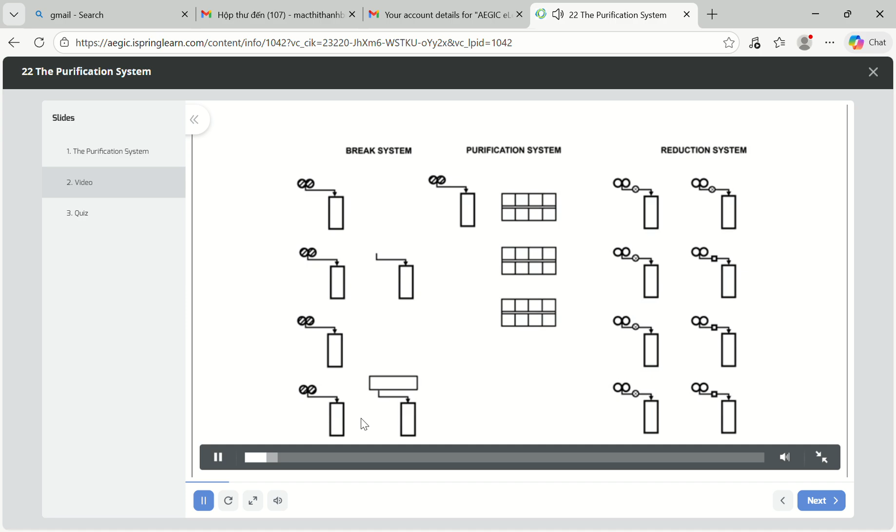The Purification System. The production of flour from conditioned wheat can be divided into three parts: the break, purification, and reduction systems. This chapter is about the purification system. In this chapter, you will learn about the purification system and how purifiers work.

The purification system. The purification system collects semolina from the break system and, after segregating into grades based on size and purity, distributes it to the appropriate parts of the reduction system. The system is mostly made up of purifiers and may also include finely fluted rolls called scratch rolls.

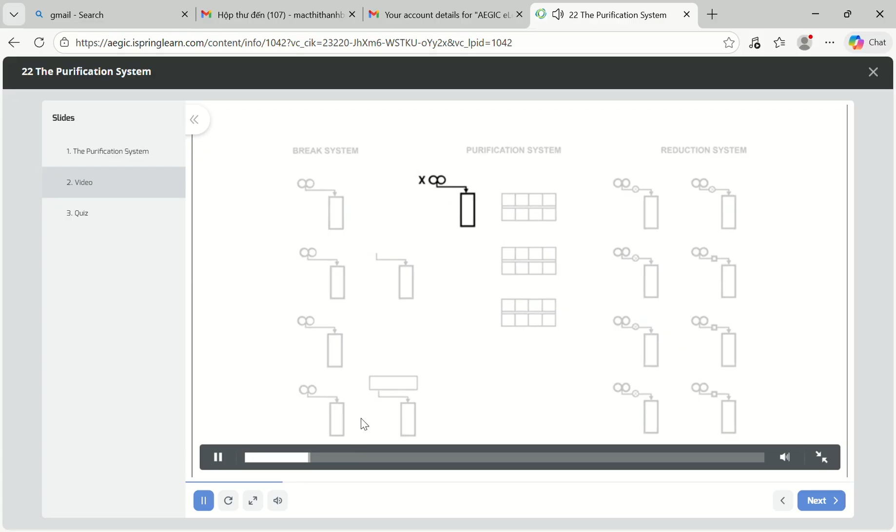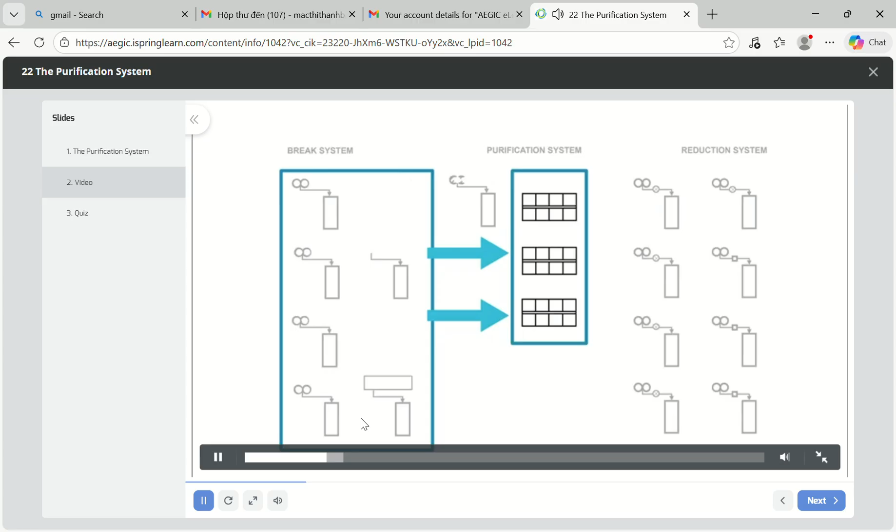The purifiers are usually all located together on the same floor. Scratch rolls are located on the same floor as all the other roller mills. The semolina from the break system is segregated by purifiers. The purifiers will segregate the semolina by size and purity.

After purification, some of it is mostly pure endosperm particles. Some of it is mostly bran particles, and some is mostly composite particles consisting of bran and endosperm joined together. There will also be some germ in the mix, but germ extraction is beyond the scope of this course.

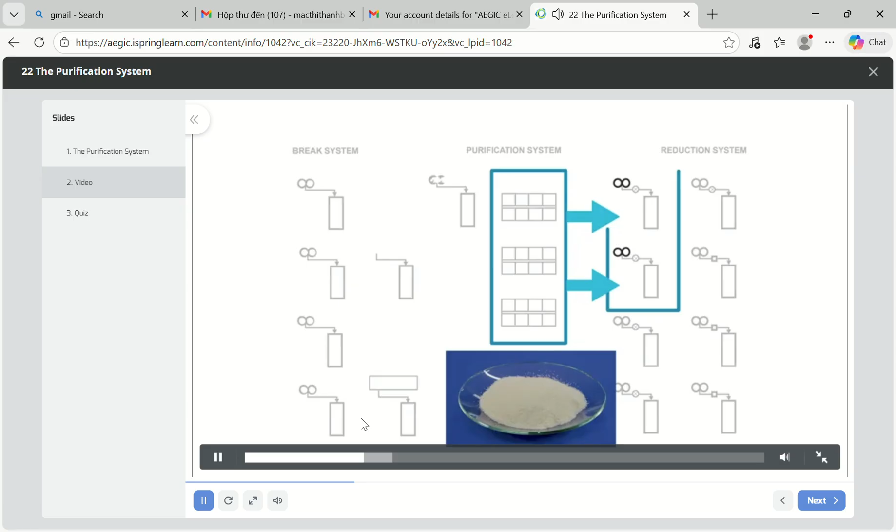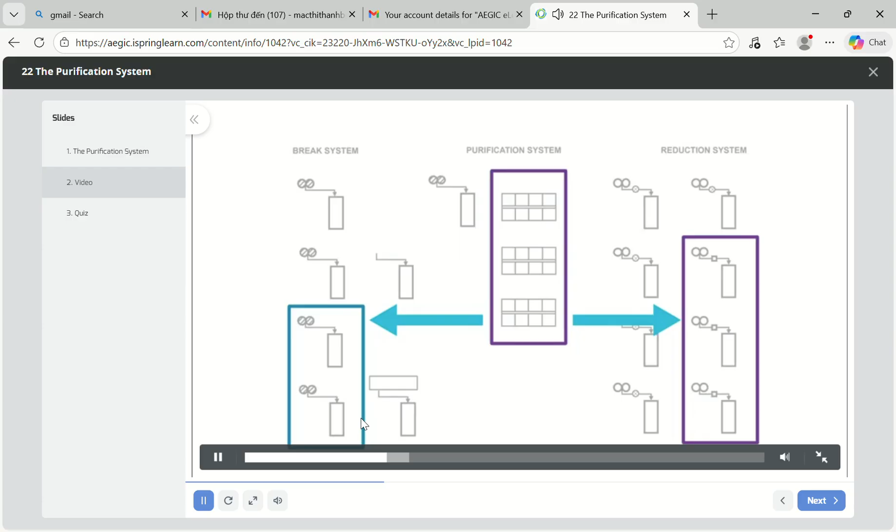The pure semolina will be sent to the beginning of the reduction system for grinding. Very clean flour streams are produced at these passages. Larger particles may be sent to different rolls to allow more accurate grinding. Bran-contaminated stocks will be sent to the end of the break and reduction systems, where the bran powder produced during grinding will not contaminate the cleaner flour streams.

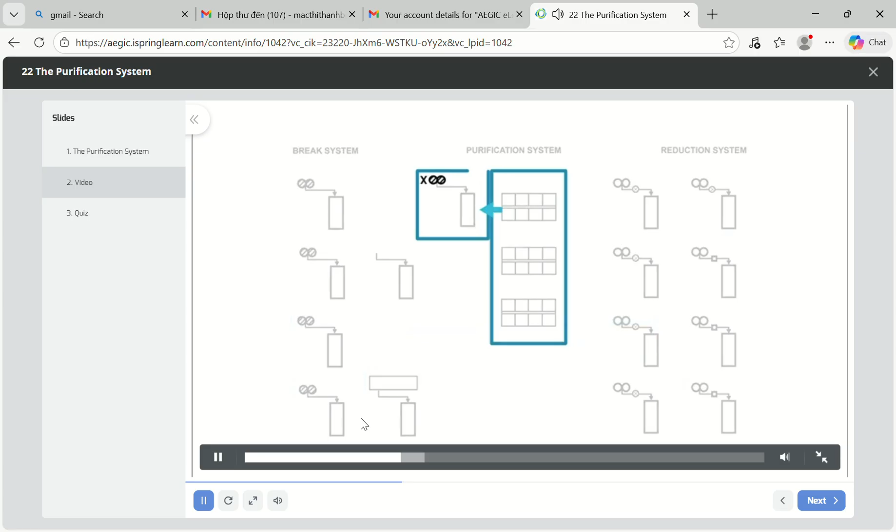Small composite particles may be sent here too, but the larger of these composite particles will be sent to the scratch rolls, where the finely fluted rolls can scratch the bran and endosperm away from each other. The scratch roll stock will be sifted to remove any material too fine to be purified, and the remainder sent back to different purifiers for segregation and grading.

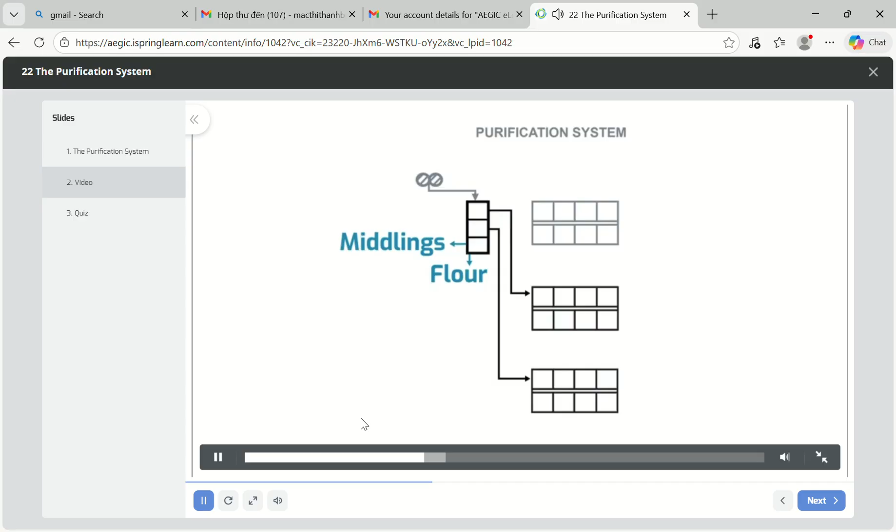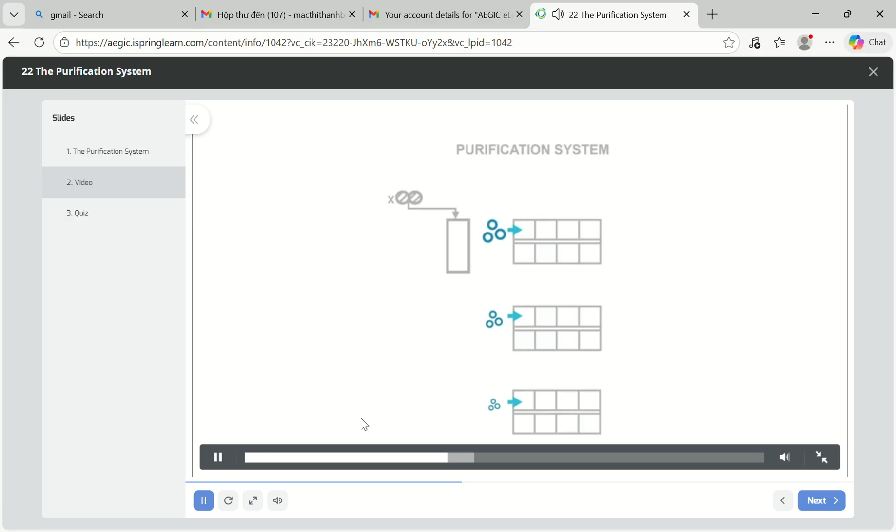Purifiers. Purifiers segregate semolina by size and composition. They need to be fed by pre-sifted stock, as each purifier is designed to handle a specific particle size range of semolina. The stock passes through a feed mechanism, which spreads the stock over the full width of the machine.

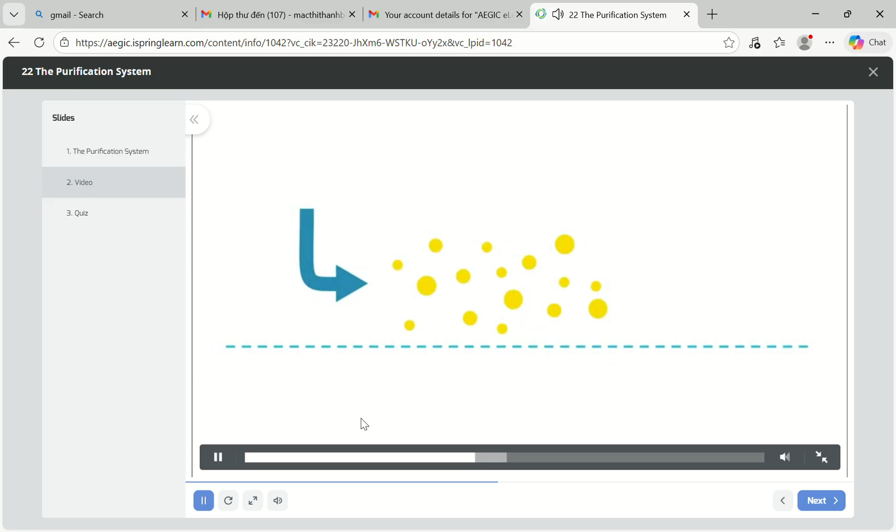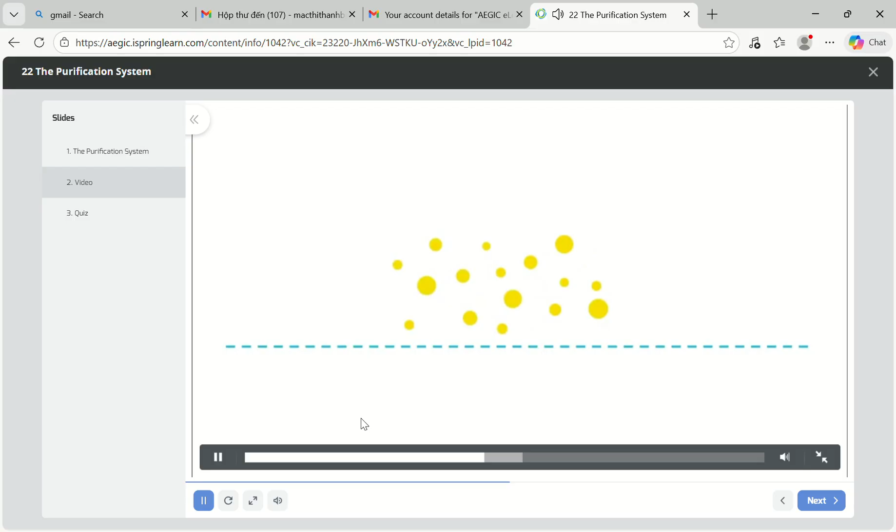The stock then passes over a vibrating sieve deck. The deck consists of 4 sieve frames in series, each with progressively more open apertures. The vibration helps the stock to move forward along the deck, but also to stratify by size. As the screen vibrates, smaller particles tend to fall to the bottom of the mass. Particles that are too small can actually prevent this segregation by causing the stocks to stick together.

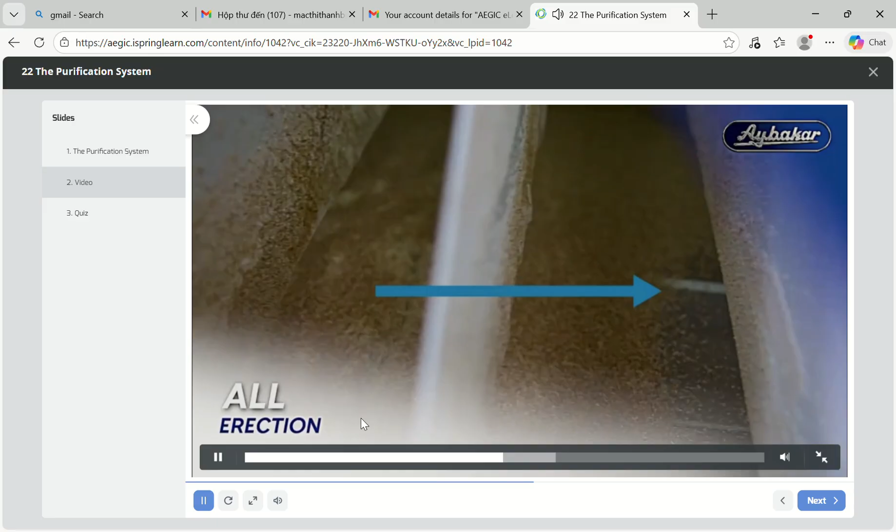Therefore, stocks destined for the purifier must be well sifted to remove their stickier, undersized particles so that they do not reduce the free-flowing nature of the semolina or impede the movement of the semolina along the screens. The screens in each deck range from fine screens at the beginning to open screens at the end. These screens may be kept clean by balls or brushes which move up and down the screen.

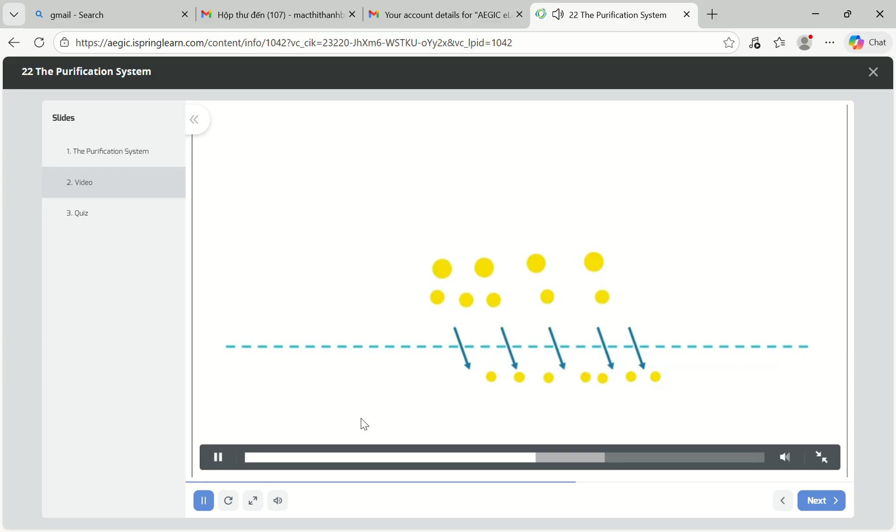Many purifiers have double or triple decks. As the shaking action causes the stock to stratify, the smaller particles at the bottom of the mass fall through the screen first. While all of this is happening, air is being drawn up through the screens. The particles differ both by size and by composition. Some particles are composed of mostly endosperm, others mostly of bran, others could be equal parts of both. These particles differ in composition and so are affected differently by the air current.

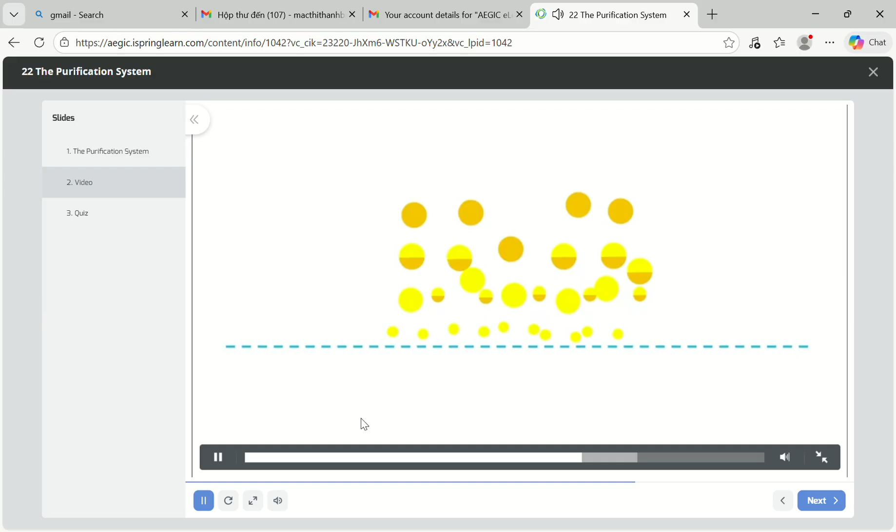Since bran is lighter than endosperm, particles containing more bran will lift above the heavier endosperm particles. The more bran they contain, the higher they lift. This process stratifies the stock by both composition and size. Some particles of pure bran are small and light enough to be lifted out of the mass and into the dust collection system.

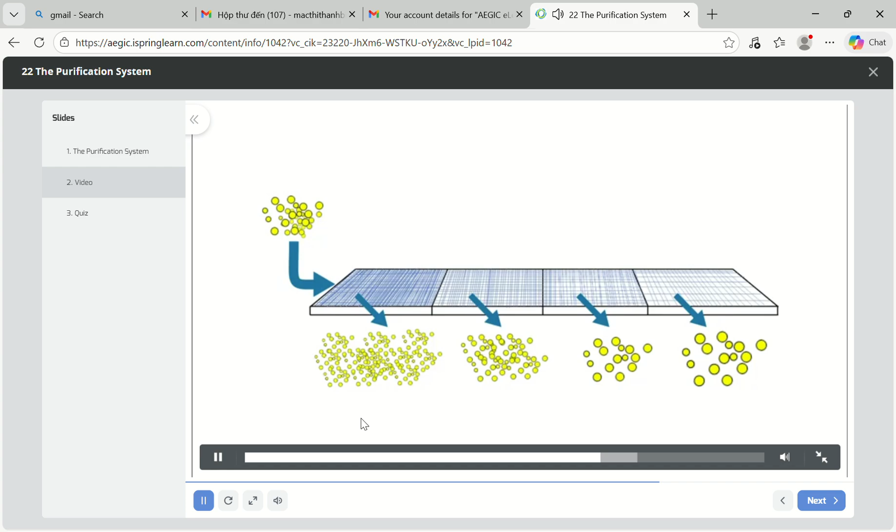As the screen apertures towards the end get larger, so the particles falling through the screen also get larger. Since the branier particles are held up higher, the endosperm particles fall through before the brany particles of the same size. So, the stock towards the end of the purifier becomes larger and contains more bran. The larger stock containing the most bran tails the last screen.

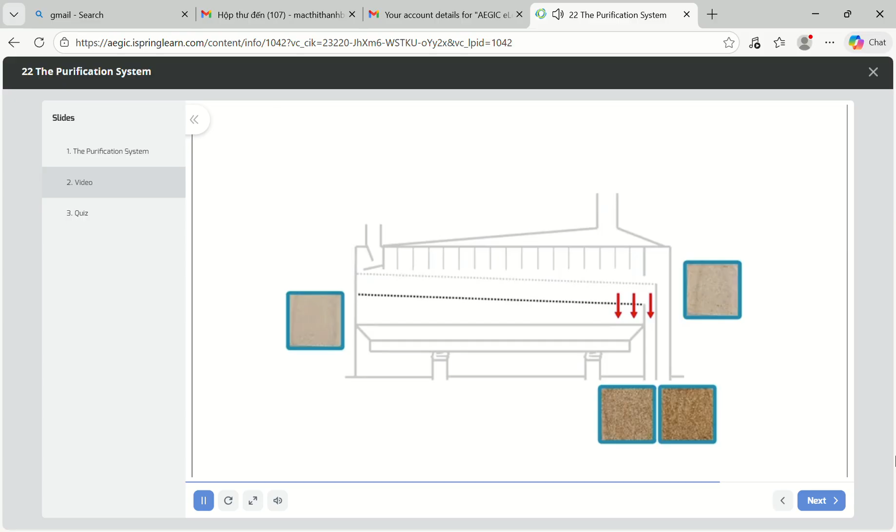The screens in the top deck of a multi-deck purifier are the most open. Each deck below is slightly finer, so the tails of each of these screens will be slightly finer and contain less bran. The throughs of the bottom deck are a spectrum of stock types from fine and pure at the head end to coarse and moderately brany at the tail end. The throughs at the head end should be mostly endosperm. The tails of the top deck should be mostly bran, while the remaining stock should be somewhere in between.

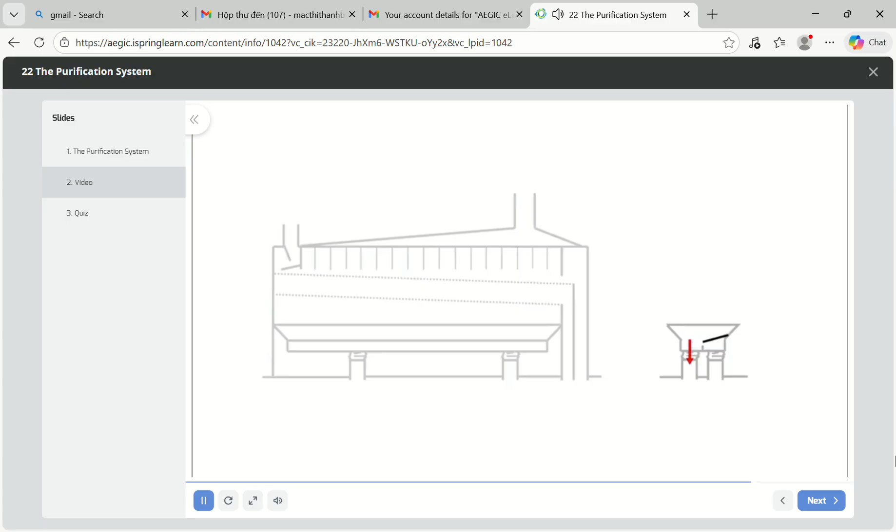There are two collecting channels below the bottom deck, each directing the throughs to different outlet spouts. Flaps in these channels control which channel the stock lands in. The flaps can be adjusted and used to create the optimal split of stock to the appropriate outlet spouts. These channels vibrate along with the decks to cause horizontal stock movement to outlet spouts.

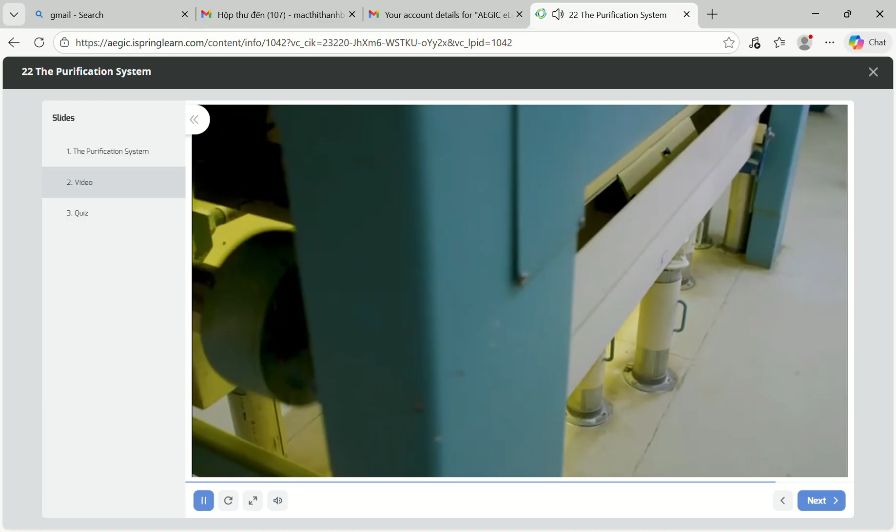Above the decks, air channels are positioned over sections of the screen so that the air current strength can be optimized for each section. Air strength should generally be set so that it is weakest at the first screen and strongest at the last screen. The air should be strong enough to cause the stock to bubble slightly, but must also be even across the full width of the screen. There must be enough stock to cover the full width of the screen, or the air will rush through the uncovered section and do nothing in the covered section.

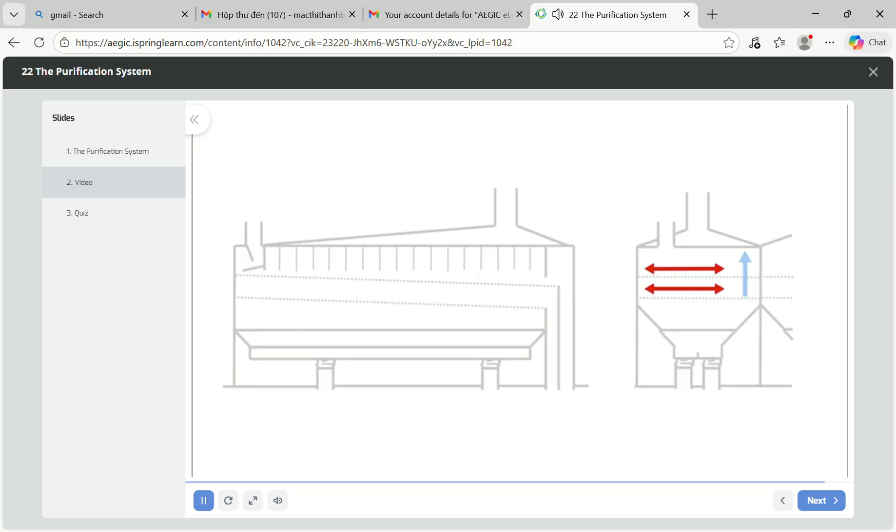This chapter has covered the design of the purification system and how purifiers work. The quiz that follows will help you to confirm your knowledge.